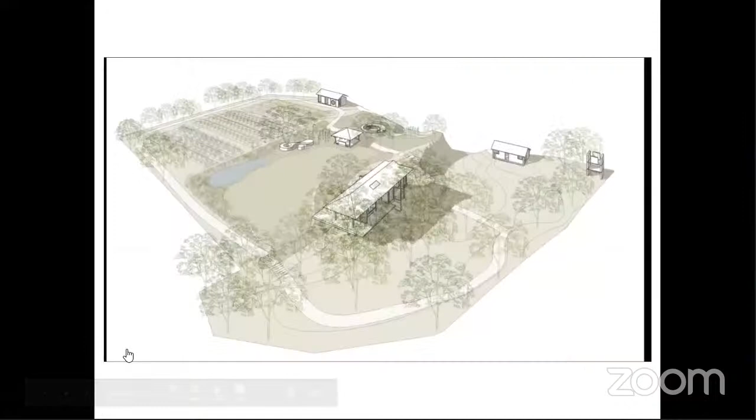Design United is a platform to create collaborations and opportunities amongst emerging designers from our region. Started during the pandemic, it has created connections and in-progress sessions with younger designers being mentored by leading eminent designers from around South Asia. Design Conversation and Design United has featured talented emerging designers from India, Nepal, Sri Lanka, Pakistan, and Bangladesh, selected for their innovative approaches and practices that have a deep resonance with the place they are from. Design United firmly believes in interdisciplinary conversation and learning, believing this will lead to a cross-pollination of ideas across various design disciplines and richer collaborations.

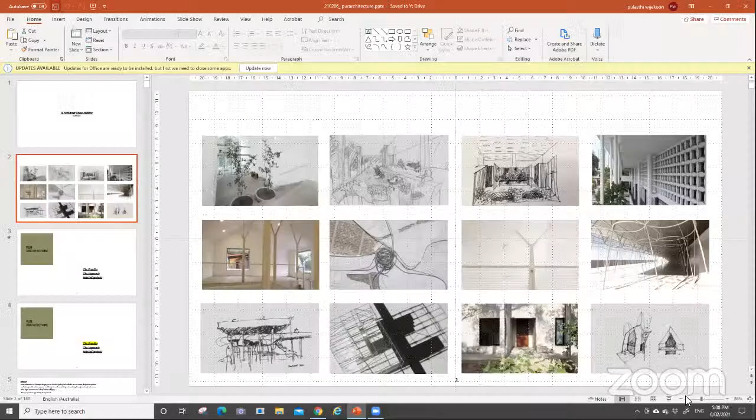So with that, today we've got - we are PUR Architecture - and today we've got a little bit of detail about our practice and our design approach, leading to some in-detail case studies of selected projects. About the practice: we are a boutique design practice based in Sydney and Colombo. I wouldn't elaborate on this one because it's already been talked about, but I just want to emphasize that we place a lot of weight on the idea work that we do - the work that happens before the real physical work begins, before the real drawing, drafting and sketching begins - the conceptual idea work. We put a lot of value on that in our practice.

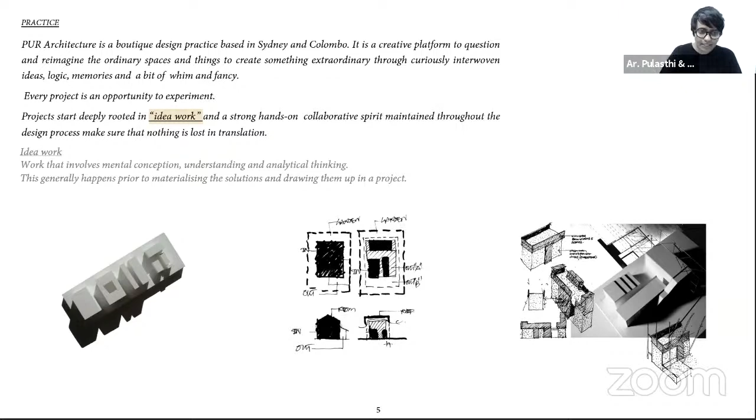And we have a commitment to sustainability, and for us, sustainability is not just the numbers, not just ticking the boxes. We work in, the way we work is we do a lot of passive design strategies in our designs, and then we use a very inclusive process, including the clients and all the parties involved in a project, digging deep, getting their ideas.

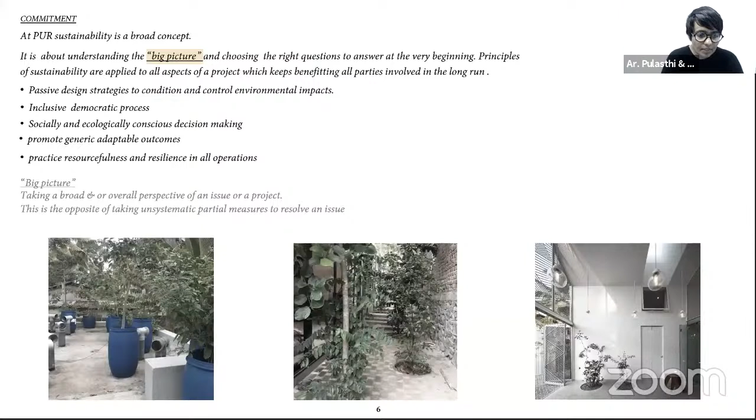And we are very conscious about our social and ecological impact of our projects, and promote generic, adaptable design solutions rather than specific ones, so that if your circumstances change in a few years time, still you can adapt the designs and it won't be redundant.

And we are a very resourceful and resilient practice in all our operations. We've been together, Pulasthi and myself, for more than 15 years, and we work with people that we know, that we have very good relationships with, lifelong relationships, who share the same passion and commitment to design and architecture. This includes the people that we work with as well as people that we work for.

And as Varuna mentioned, Pulasthi is the design director for DG5, a Sri Lankan firm doing a lot of good work in Sri Lanka.

Like drawing, and even before drawing, getting the ideas, composing it all in my head, telling stories, getting the characters, the ingredients together, composing and activating drama, like in space making and in architecture. So it's very similar to my childhood habit.

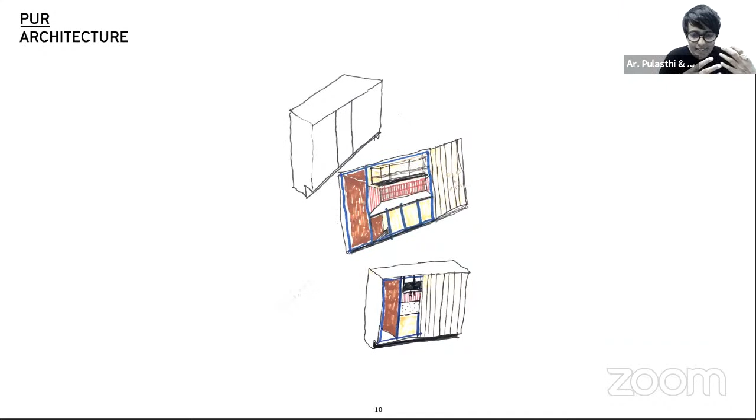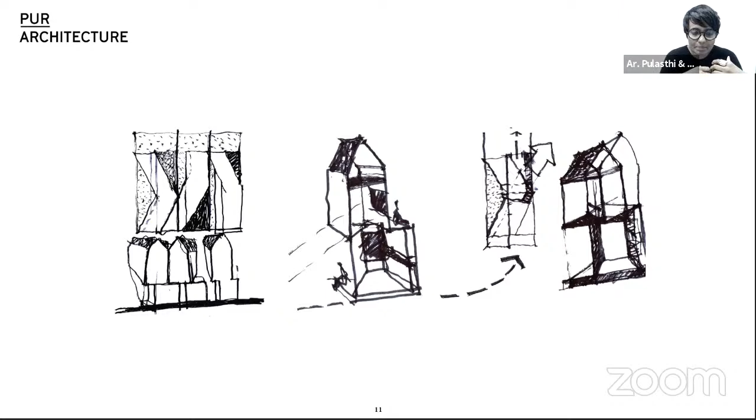So in our practice, we do a lot of drawings, a lot of doodling, a lot of sketching, and I feel that it's all an extension from our childhood habits, childhood passions. These drawings, I feel, are a bit different to what we used to do as painters, but they are a bit more meaningful now, have a bit more depth, and a different dimension.

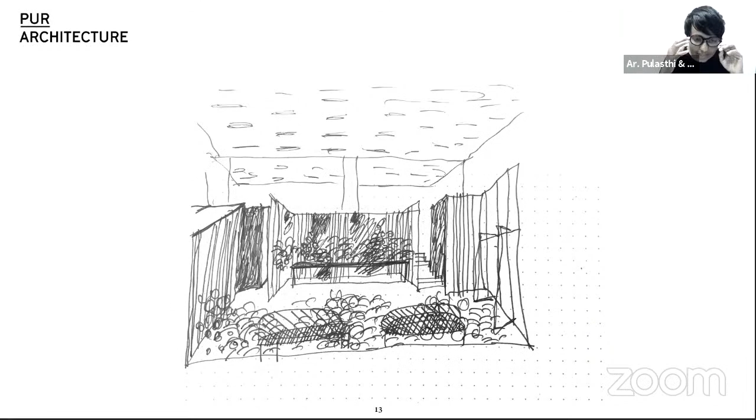And this is how we organize our thoughts in architecture, in space, in creating things. And this is how we communicate. This is how we draw out the ideas from inside, the visions, the dreaming, onto the paper and lay it out. This is how we communicate now. This is how we design now.

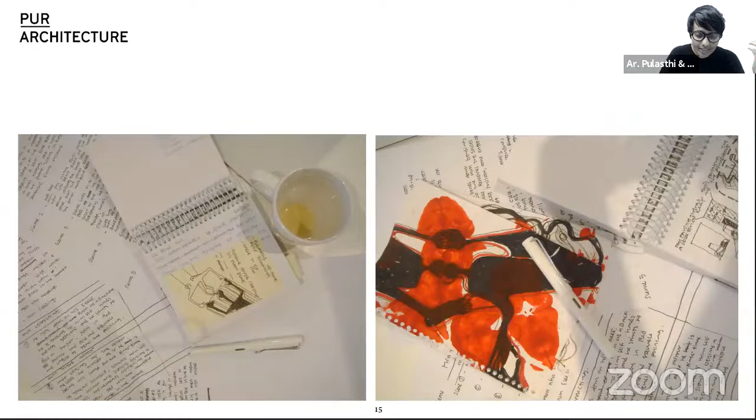And we do other things, like random things like writing short stories and trying to act them, trying to film them, and making abstract models to explore spatial ideas. We've always been making models and then photographing them and exploring communication through models.

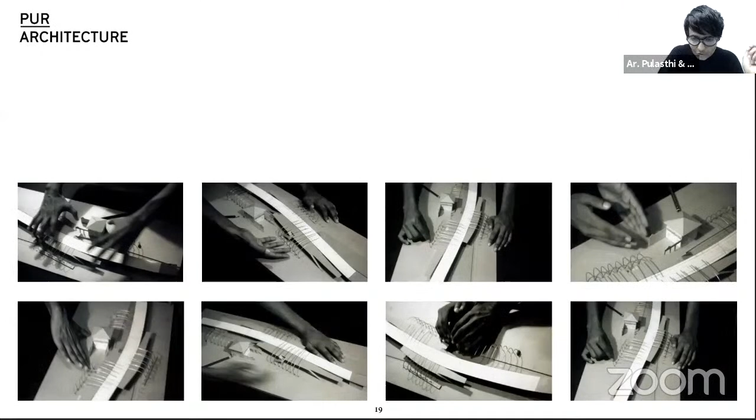So I would go through briefly a few random projects just to show our design approach, how we approach design in general in our studio. We use a lot of logic, a very logical approach to design.

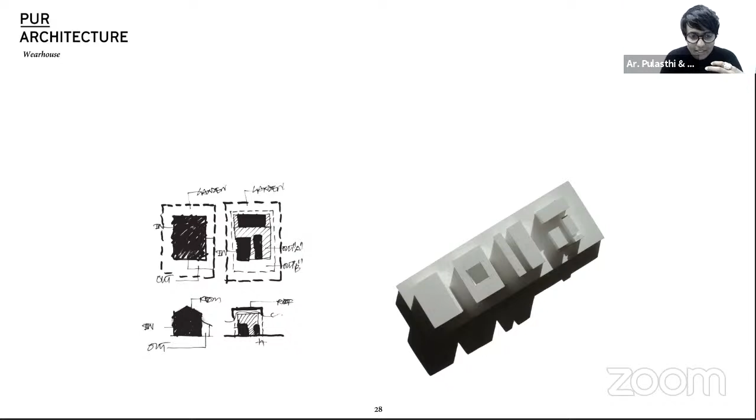This one is called Wearhouse, and it's a small suburban house in Colombo. Here we used a lot of why nots and what ifs, and we did a lot of things which generally in residential design people don't do. We did that with a lot of logic to back it up, and then we communicated it with the client, and with the client's understanding and approval.

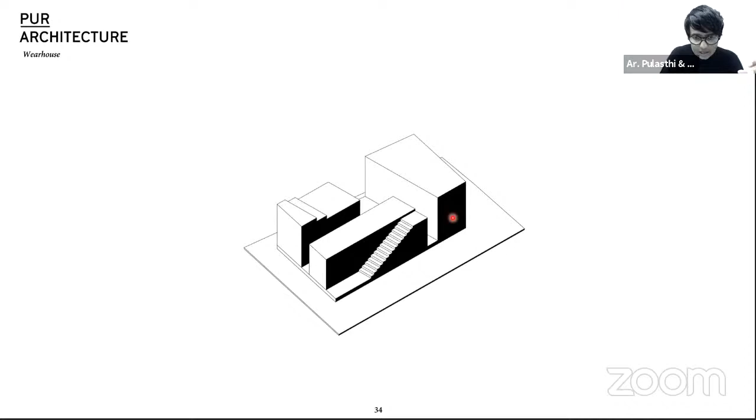So here's the site, and that's the building footprint. What we did was create 3 podium volumes, and these 3 podium volumes contain the sleeping and service areas of the house, the bathrooms, laundry, the sleeping areas. Then we created a big roof on top, which creates a volume, a field of space. And those 3 pavilions in the upper level become all the social spaces of the house, including the kitchen.

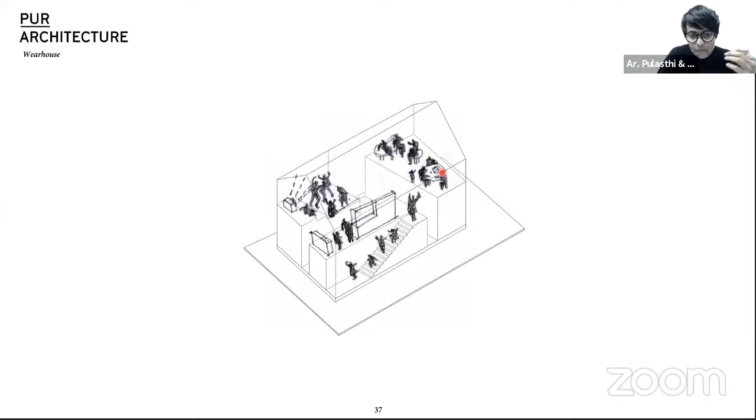So in a party, when you have a big crowd, you can really connect the whole space together, or have few people visiting, or watching a movie with a drop-down screen, or just the 3 family members having a quiet meal in the kitchen, while all the bedrooms and sleeping areas, the private areas, are tucked away underneath in the ground level. So this is a very different approach, but yes, we communicated this and talked about it with the client, and with their approval.

And then the roof is held up by all these ornamental tree-like columns.

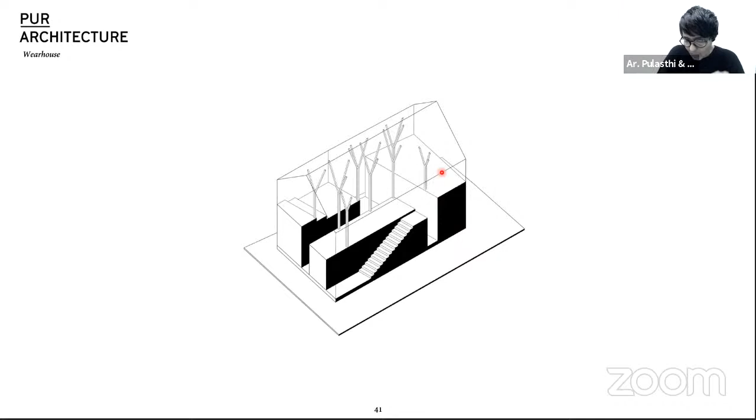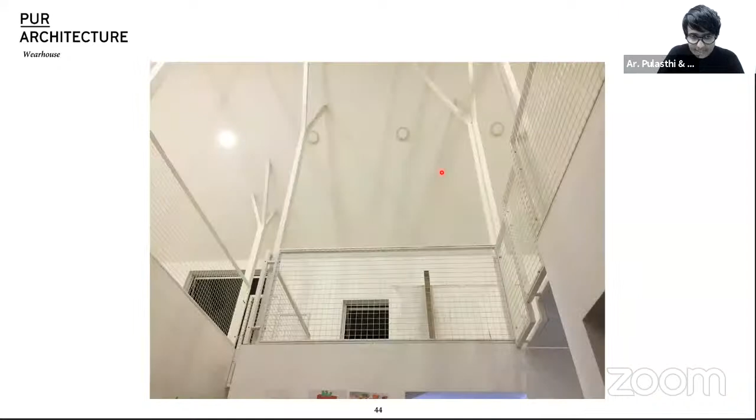And they look beautiful, but they are the structure which is holding up the roof. That sort of integrated approach to architecture is what we like to do in our studio, integrating structure and the aesthetics.

Our task was to design a function hall. We wanted to create a big volume of space and give it a bit of ornament, a bit of uplifting, so that the function hall becomes a space that you can celebrate things in, that brings in that spirit.

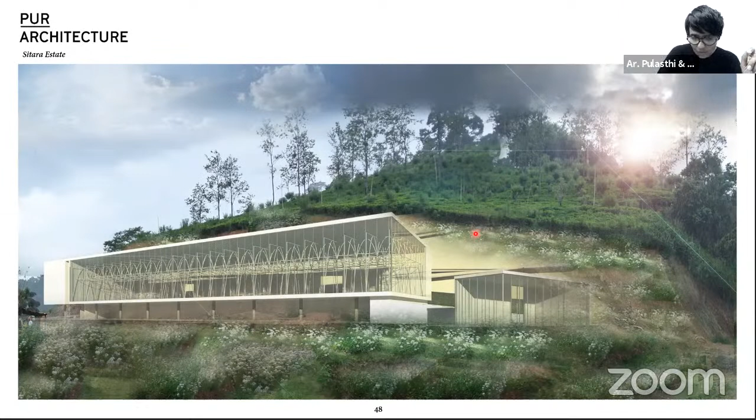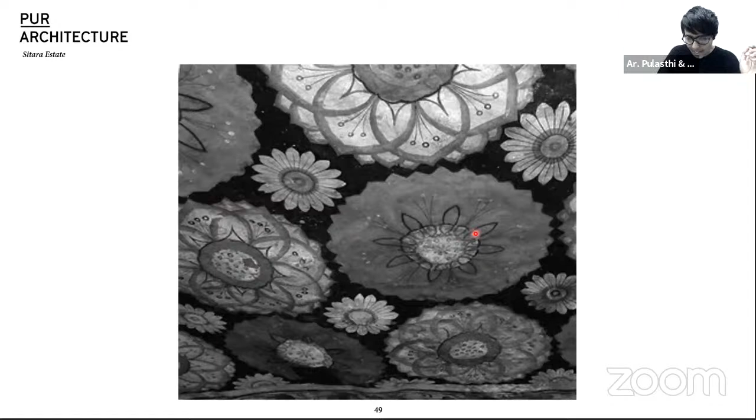This is ceiling frescoes from a traditional temple in Sri Lanka. In those cave temples, they used to paint floral motifs on the ceiling, called the Uduviyana, meaning a special sort of ceiling. Inspired by that, we created a Uduviyana, a celebrated ceiling, which incorporates our structure as well as the aesthetics.

And this was the result. So that's another view of that.

Also, we like to participate in competitions. I think that really opens up and lets us explore our ideas, test our ideas, when you're doing a competition.

This is a competition entry we did in 2010 for the Future High Rise competition. Here we created a high rise which is not the normal high rise, not what we normally know, but we created several pedestrian ramps starting from several significant streets of the city, coming to a nodal point and spiraling upwards, creating a vertical volume of space.

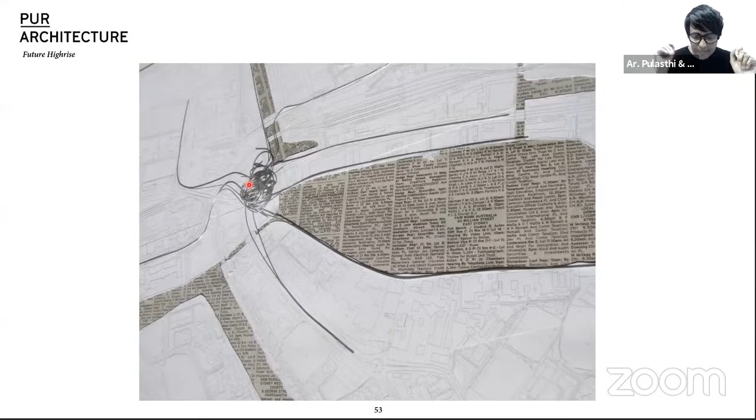This is for the street vendors of Sri Lanka, so their streets were created in a vertical volume. This is the part of the city, the lengths of the pavements these vendors are occupying. We culminated all that into 7 different ramps, starting from 7 different locations, and vertically extruded it up, creating a vertical volume. So it's a very different high rise for a very different purpose.

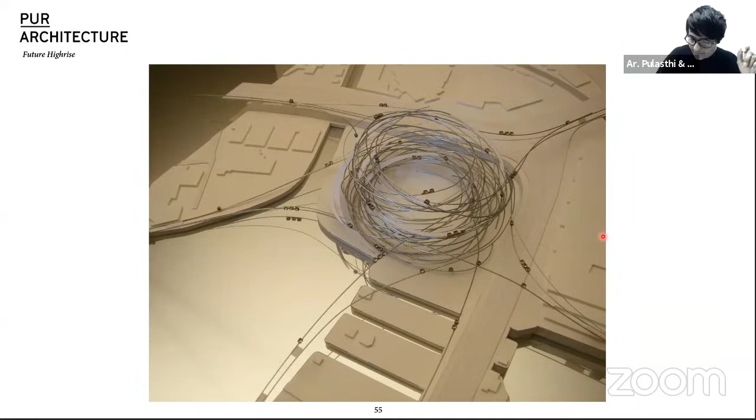So we like doing that sort of experimentation, experimenting and exploring new ideas for preconceived building typologies. This is another competition we did in 2015, Sustainable Headquarters for Sustainable Energy Authority.

We didn't win this one, but it's still a nice project to include, I thought. As the Sustainable Energy Authority, they wanted their building to be an example of sustainability.

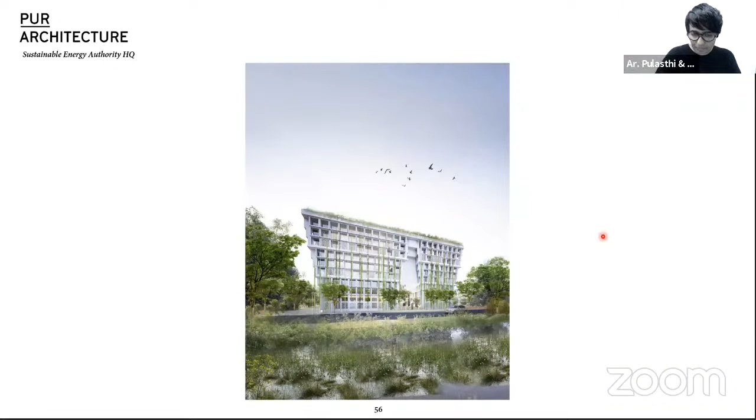We started off with the facade, creating a modulated, tapering, self-shading facade going around the building. Rather than designing one square block of a building, we tapered the edges and created a courtyard, an open volume in the middle, with all the facades tapering.

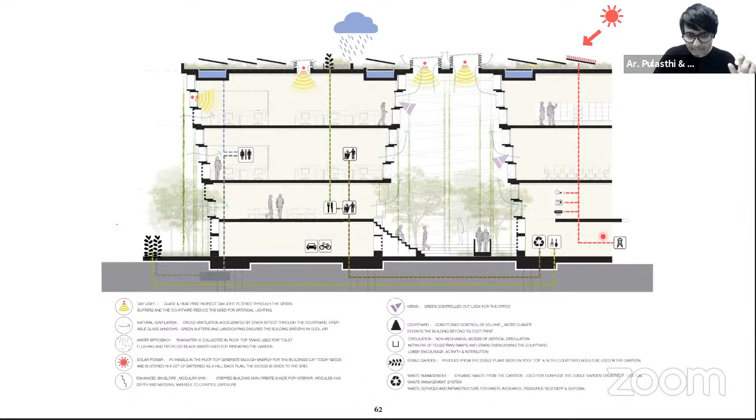And that is the result. This ESD diagram shows all the operations, how this building is functioning, how the cross ventilation is working, how we are getting light from the courtyard in the middle, how we are creating a central space with trees and social interactions, and how the filtered light is coming into the building — all of these things with one integrated solution.

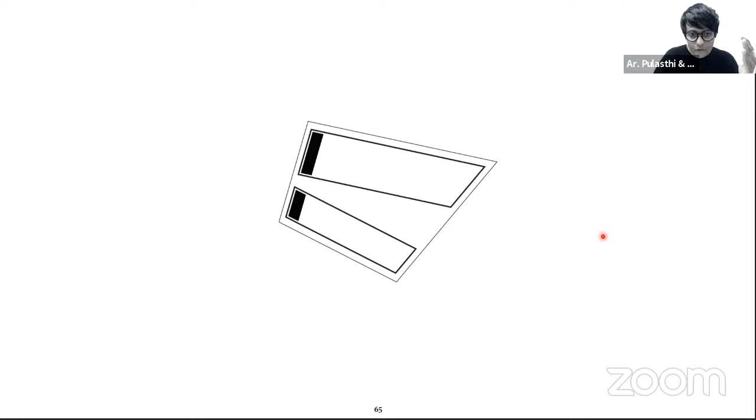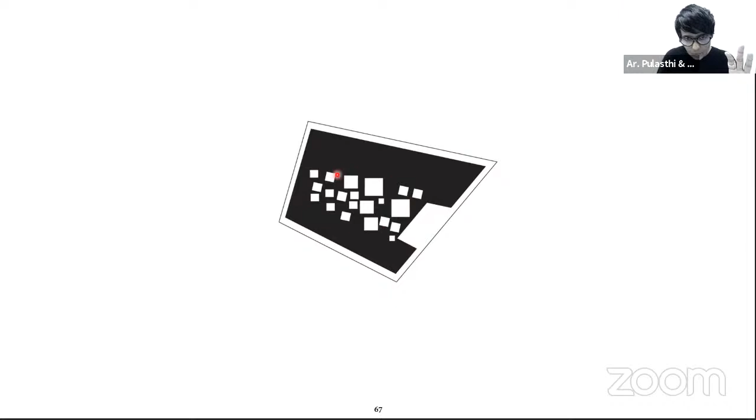This is the site, and we placed two blocks of building facing the shorter sides east and west for better orientation, and circulated the services on the western side to block excess heat gain. This is a lift-free building, so all the pedestrian circulation — staircases, connecting bridge, and the pedestrian ramp — frame the courtyard. On the rooftop, we put a slab over, and a lot of skylights.

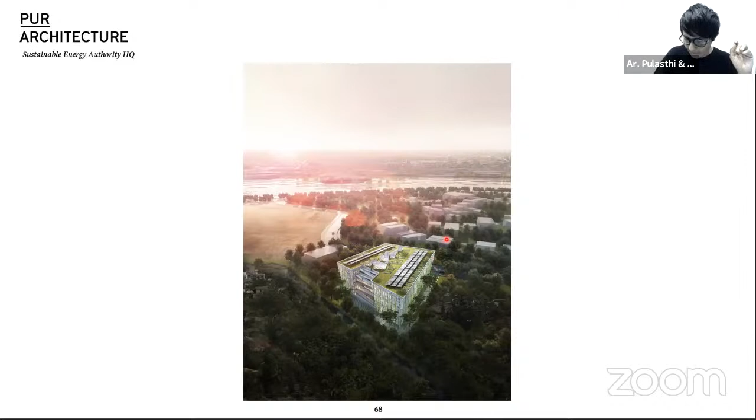That's the aerial view — that's the Sri Lankan Parliament here, and we are here. That's the courtyard building, the main social space, which feeds into the interiors of the building, bringing in light and ventilation and creating a big social space. And that's the facade system, a modular facade where we can select and choose the modules and materiality to adapt.

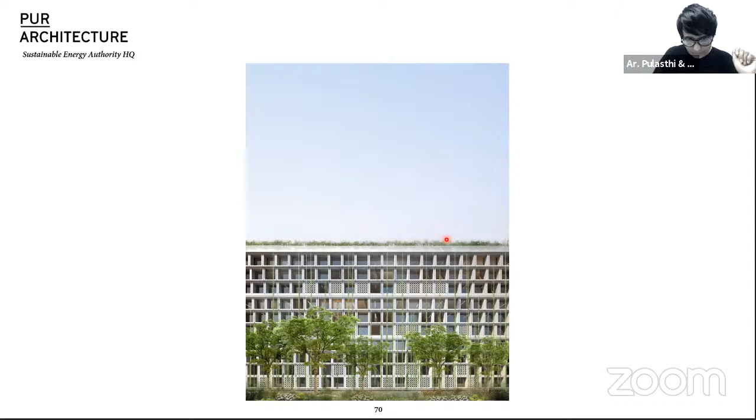So with that, I will go into some projects in detail.

We got 3 projects today: House in House, Big Tree Small Plants, and the CMC office building.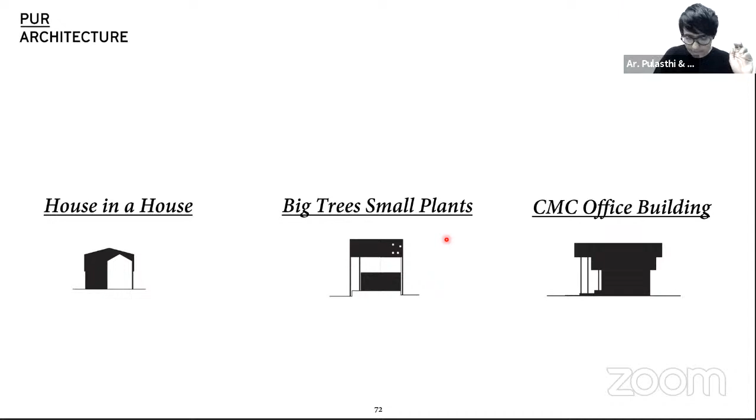House in House is probably one some of you have seen. It's a suburban house in Colombo. That's the site, a rectilinear site where we created a rectilinear block with a barn-shaped roof, and then putting an extrusion through that. The idea was to create a tunnel through from here to the other side, connecting the front garden to the rear garden, and putting some skylights through east facing.

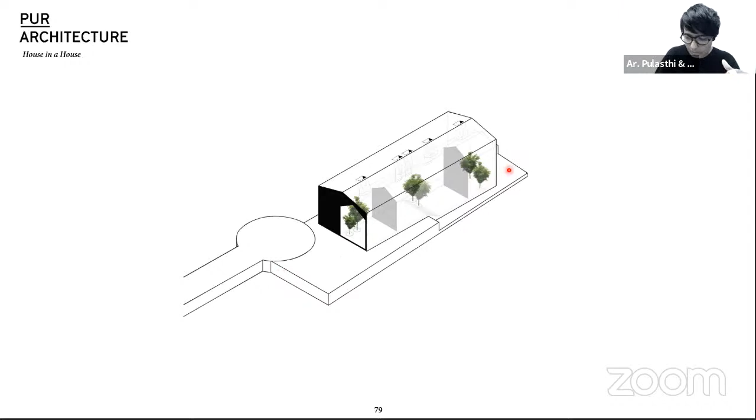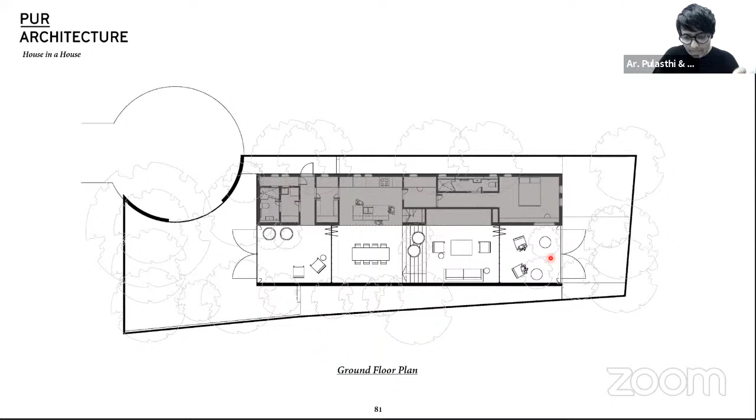In the plan, we just had a bare site with 2 coconut trees, and then we ended up planting 24 trees, and internally we ended up planting 6 trees. The zoning of the plan is all the living and service areas on one wing, and all the main living spaces on the other wing, which is a double height.

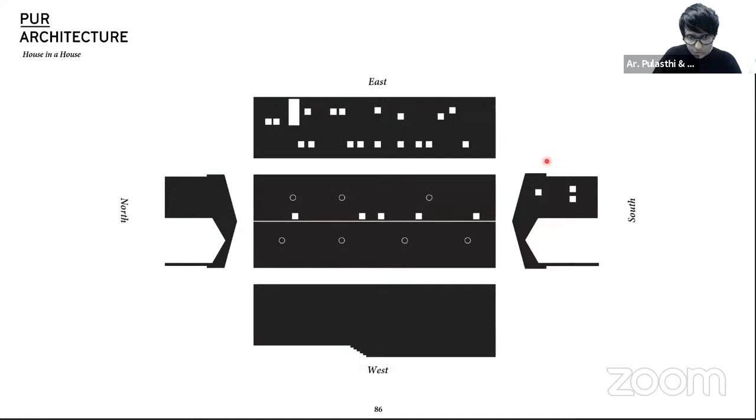This is showing all the external facades of the house, all 4 facades and the roof here. You can see that the western facade has no opening, not a single window in it. All the small windows we've got are on the eastern side, very small, to generate air circulation and cross ventilation. The main source of light is the 5 skylights on the roof.

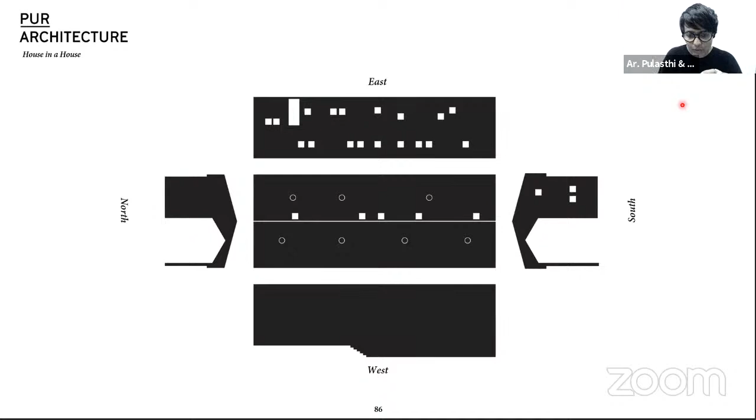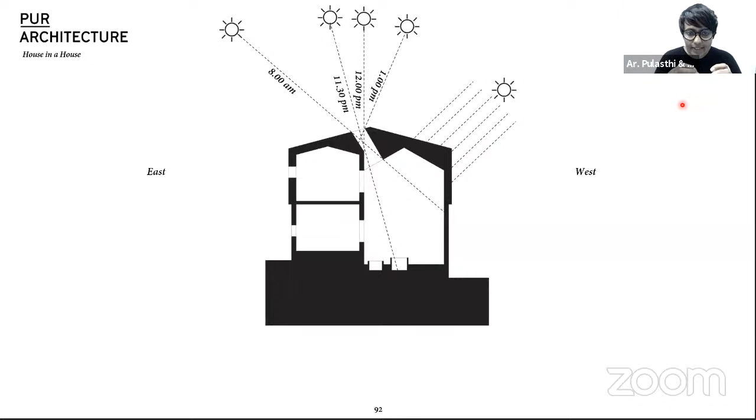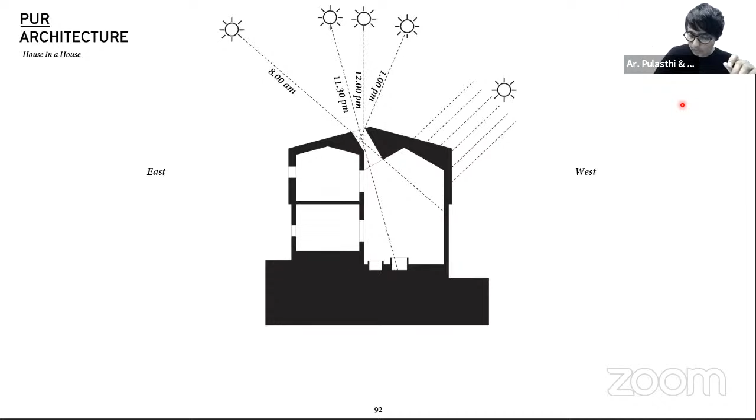The way the skylights are working is because of their angle. On the west side we don't have any opening at all, but because of the skylight angle, the midday hot sun is not coming in. It's always filtered, always soft light coming through. As the sun moves, you can see the shadows moving as well, animating the whole space.

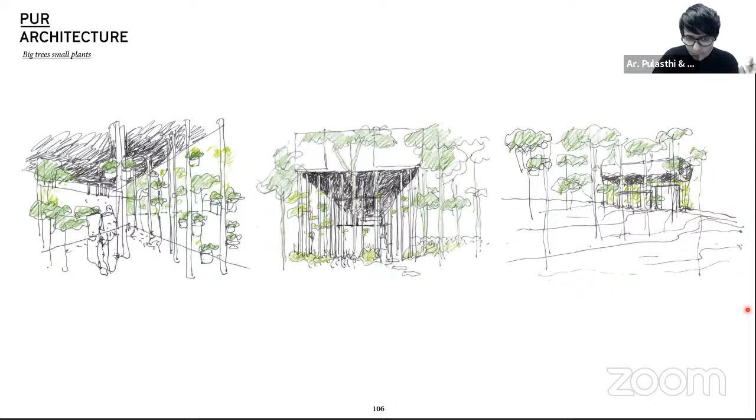With the site planning, we had a relatively larger site here, but the idea was to concentrate the development so that we retain more of the garden area. So we went vertically, and also located the house right at the corner of the site, with only space for a small service pathway. That way we retain most of the site for enjoying.

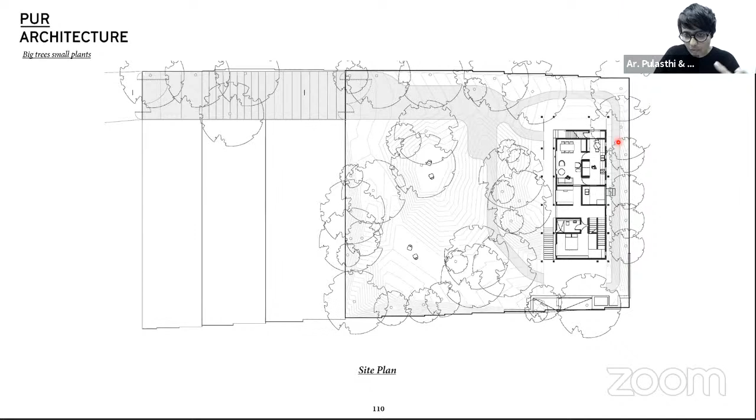In the ground floor, normally ground floors need a lot of things, so we let the ground floor have all of that, but the main living area we located on level 1, one whole floor dedicated for living, and then to the full length of the living floor we got a veranda.

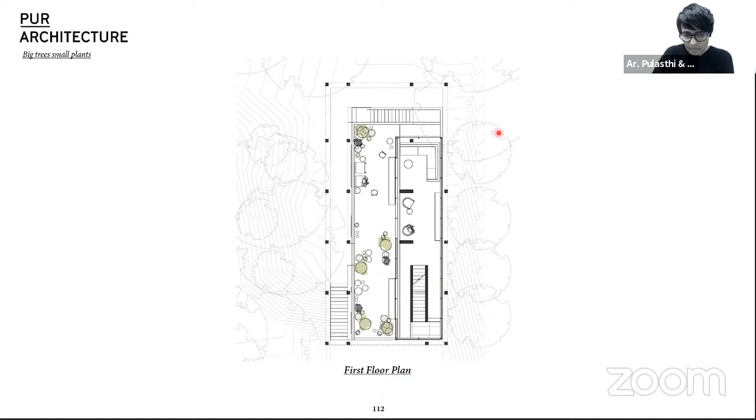So when you open up the sliding windows, the whole thing becomes one big space. Then we've got the upper level, the topmost level, which acts like one big roof hovering over the whole house, held up by these slender columns.

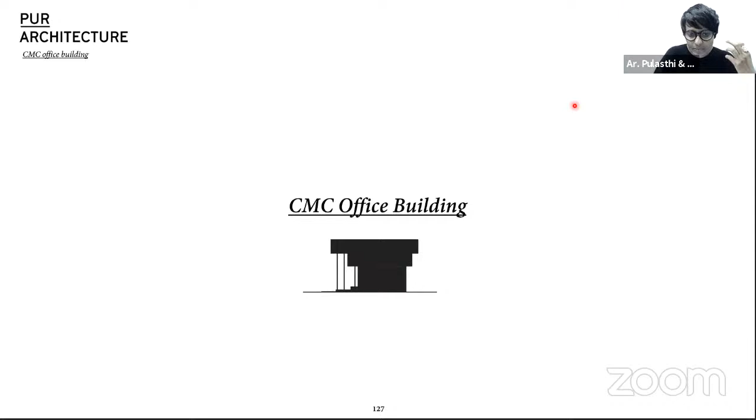This is the last project I'm presenting, and this is a competition winning entry in 2014. We entered the competition to design an office building for the Colombo Municipal Council, which is this building, which is looking like the White House, which is here.

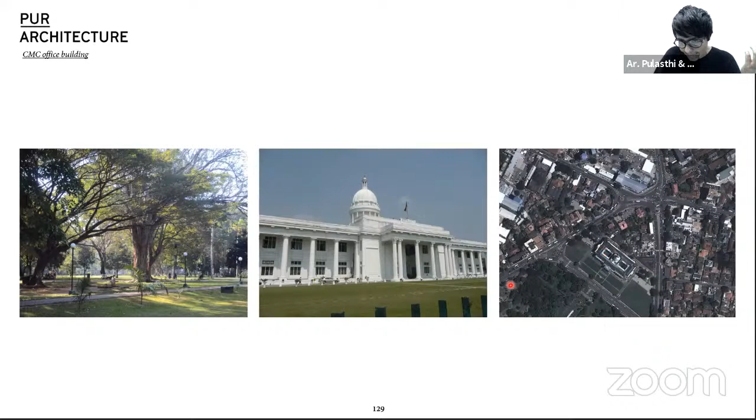And our site is this double triangular site at the back of the council building. This big, huge space here is a park. So the site is characterized by one of the main considerations, the iconic prominent council building, then the big greenery in front of it, and then all this area is the random low-rise densely packed urban fabric.

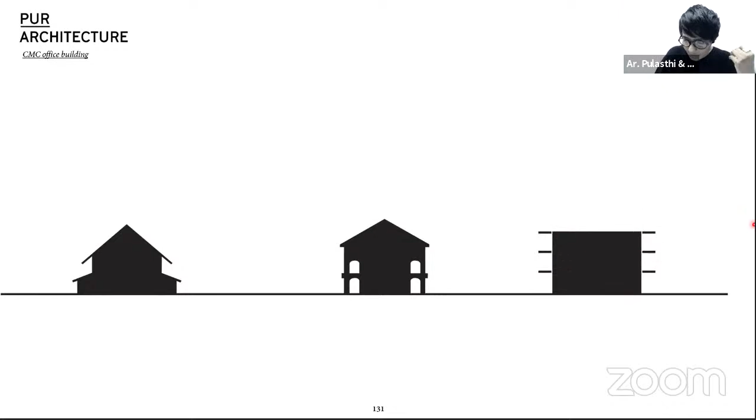So we looked at office building typologies, the veranda type, the arcade type, or the more modern box with awnings stuck onto it. And then soon we realized that this site needs something a bit more than that.

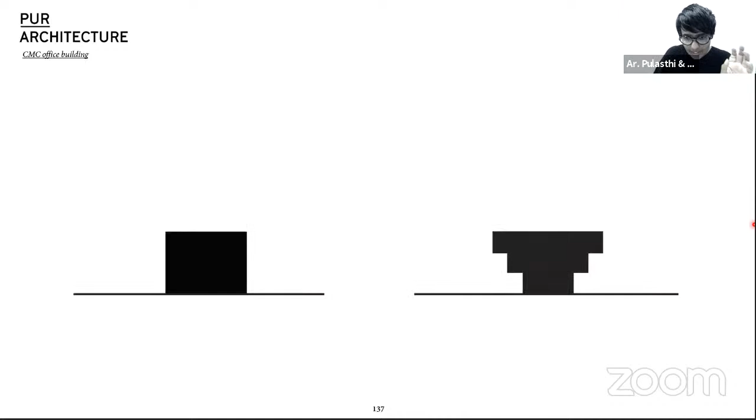So we went ahead with the box, the modern interpretation, and then we took some of the space up and put them there, creating this profile. This profile has the same floor area as the box, but it's got some attributes which really help the brief.

Got a lot more space in the ground floor for people, for more landscaping, self-shading and protection from rain, and more space on the rooftop for solar panels and rain collection.

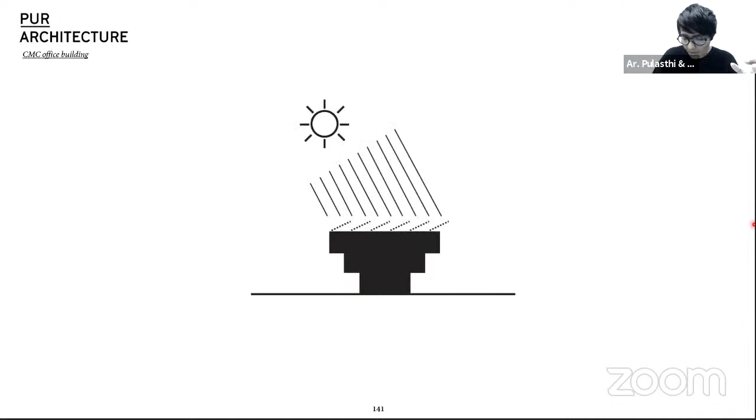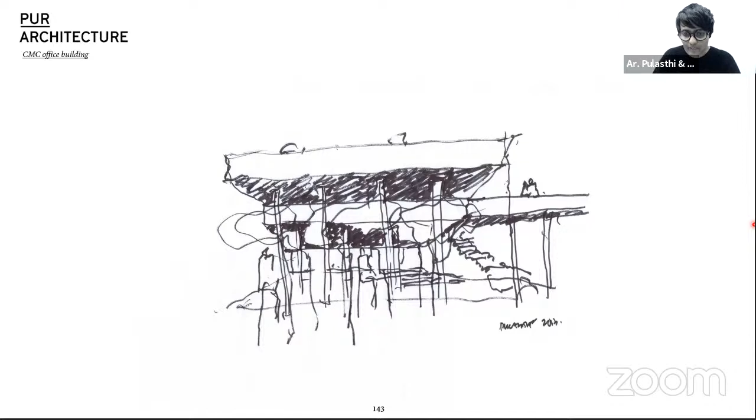So what we ended up doing is a veranda with tall columns, two double-story height columns with lots of trees in the ground floor and lots of space for people to hang around, because this is a public building and people need a lot of space. A lot of people come here, this is the council building, and they need space to hang around.

So it's very pleasurable to have a space like this. In the big picture, that's the old council with its arcade here, and then the veranda we created here, the landscaping, this is the through-site link. It's really creating and talking to each other, creating this nice atmosphere and a public space outside.

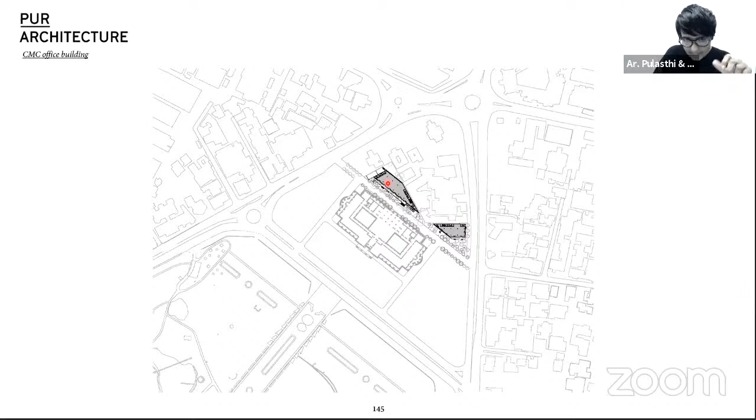So this is in plan, that's the through-site link with all the landscaping and verandas, and it's really melting together in the site and providing all this space for casual waiting and hanging around for the people.

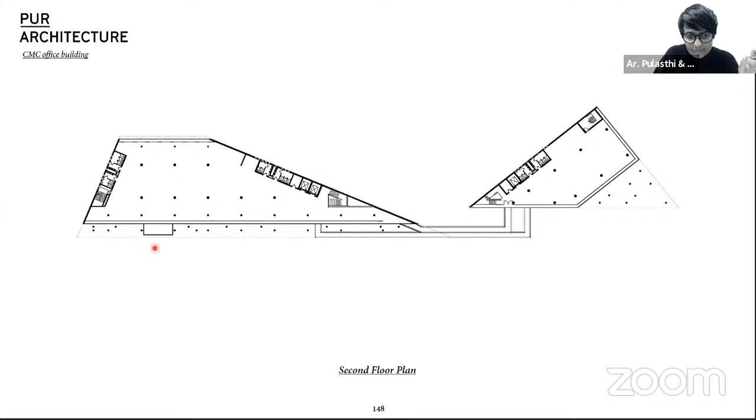So the ground floor, as you go up, the floor levels become larger, and the uppermost level is the largest, and the roof hovers over that, creating this stepping facade. You can see we've got these slender columns, which talk to the traditional columns of the existing building, and then this space is coming alive while we've got all these office spaces inside.

So we went for a recessed glazed skin with a perforated concrete screen in front, which has proven to be a very helpful thing to keep the building cool and internally creating beautiful shadows.

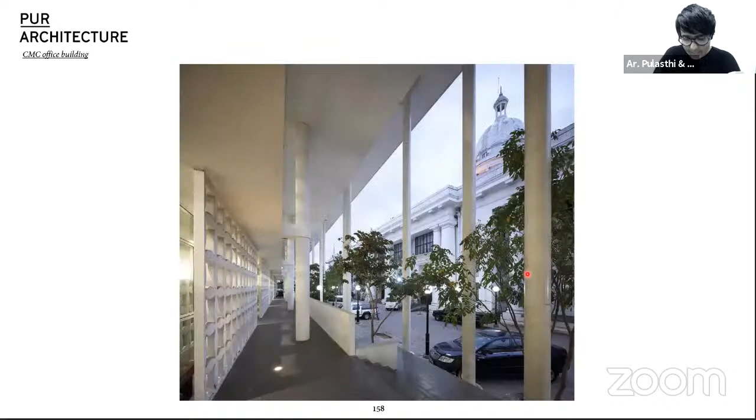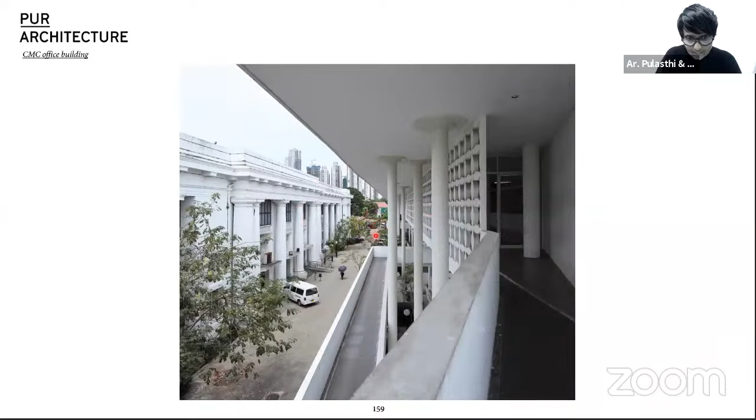And some of the images of the veranda, some of the old and the new talking to each other, linking together. Views, another view of the veranda volume.

And this is, I really like this image. It really shows two aspects of Colombo, the low-rise buildings on this side and the high-rise, more ambitious Colombo, the colonial buildings and the more modern buildings, showing what a diverse city Colombo is.

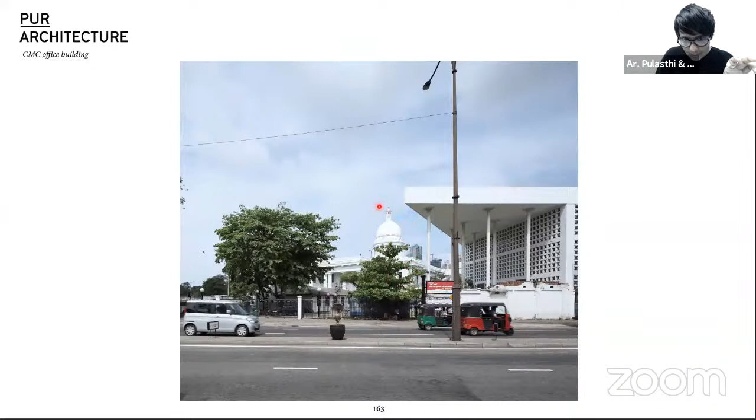And a very dynamic view with a bird at the tip of the facade of the through-site link. We initially took this volume off so that we could give more focused and framed views of the council building, as a gesture of respect to the old building.

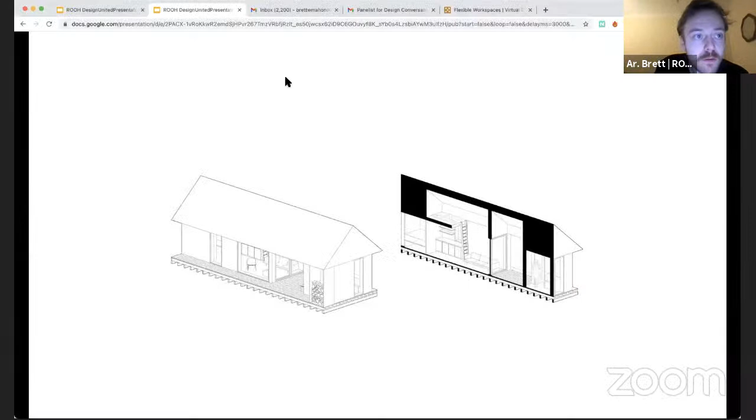Yeah, hi. Thank you, Per Architecture, for your amazing work. It's really inspirational for us to learn from you guys. And thank you, Design United, for having us and giving us an opportunity to share our work. Because I think dialogue is a very important thing in architecture, and unless we have this discourse, we don't evolve as architects and as designers. So I'm here to talk about ROOH Studio along with my friend Brett.

So ROOH Studio, we started this in 2020. We are just a group of friends who had a different perspective about architecture. This is our beautiful team, and we are all located, as you can see, in different parts of the world, working very remotely right now thanks to the pandemic. We first met a couple of years ago while running workshops. ROOH Studio started off seriously this year in Switzerland, where the four of us met and thought we should do something about our thoughts and give it a collective name. And that's how ROOH Studio started to begin.

Yeah, it really started through a conversation of friends. We all met through various student bodies of architecture, be it EASA, the European Assembly of Student Architects, or NASA India. We met, became friends, and shared a lot of similar thoughts on architecture, on where we saw it going and where our voice wanted to go with it.

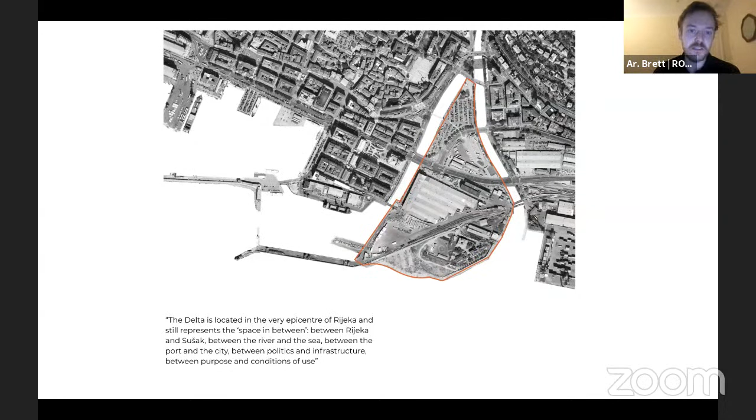This is at the core of a lot of our thought process behind architecture - we started off building quite small interventions, always focused around the social aspects of architecture and reusing and adapting spaces. So with this project, we wanted to create a focal point, and show that these buildings can be used, that there's still life and value left in industrial heritage.

Over the space of 2 weeks, there was an event held in this expo building, which held 600 architecture students living, sleeping, partying together here. That spurred us on to create a project that would become a frontage, a project that would have a dialogue with the city beyond, rather than turning its back to the industrial buildings of this area, to show that these buildings could be used.

So Level Up was essentially an event space, a hangout space, a social space at the front of this building. The inside of the building was to be used by multiple organizations over the next 2 years in the lead up to cultural capital in Rijeka, and we wanted to create a pavilion out the front that was a frontage to this, a social space.

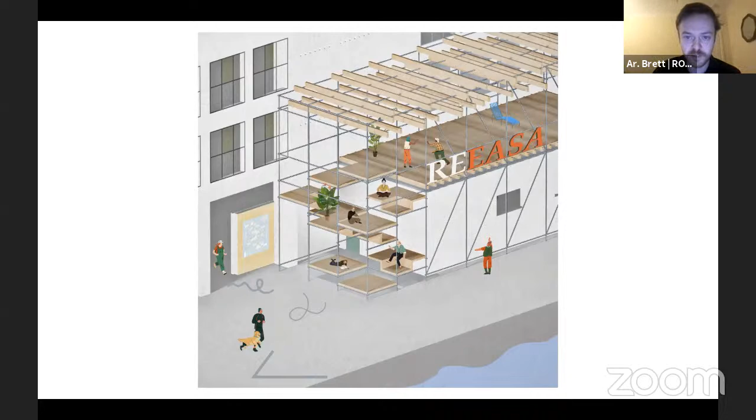It slowly developed into almost this extended staircase of the city, a hangout spot that led up to an event platform.

We were conscious of what sort of materials we wanted to use, and we wanted to be able to use the materials again, to have this idea of reuse. So we started developing this idea around using scaffolding, which could be hired and dismantled, and then timber - as simple as just timber insets, which was sourced from the local timber merchant.

All the materials and budget behind this whole project came through finding the money for this project, calling sponsors, finding people who wanted to give us materials. All the vegetation and planting was donated as well.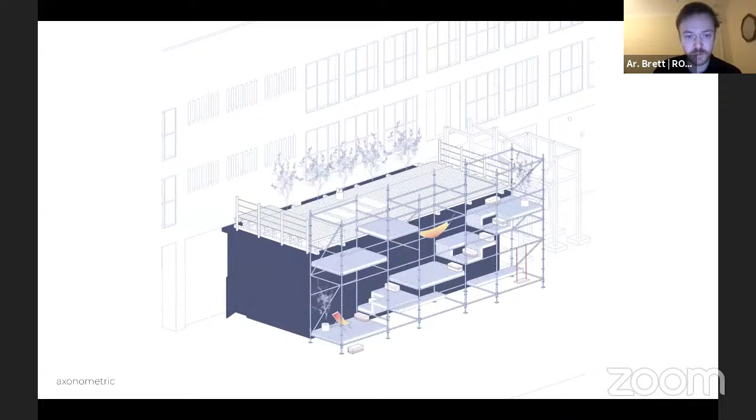So it was very much a self-built project, and this is just the 2 weeks we spent building the project, with 22 participants, and you can see they all come from different backgrounds.

This is really key to us whenever we were setting up the workshop - we wanted everyone to not know each other and to come from different backgrounds. Over the 2 weeks we slept, ate, partied, and built together, and a lot of the working out of the details we left to be figured out on site. We all worked together and learned from each other's skills to be able to build this, and we kind of became a family for those 2 weeks.

It was a really, really inspiring project that taught us a lot about how we could build something and raise awareness, and also that we didn't necessarily need to wait - we could be proactive about finding projects ourselves, proactive about finding the money, and also learn how to self-build.

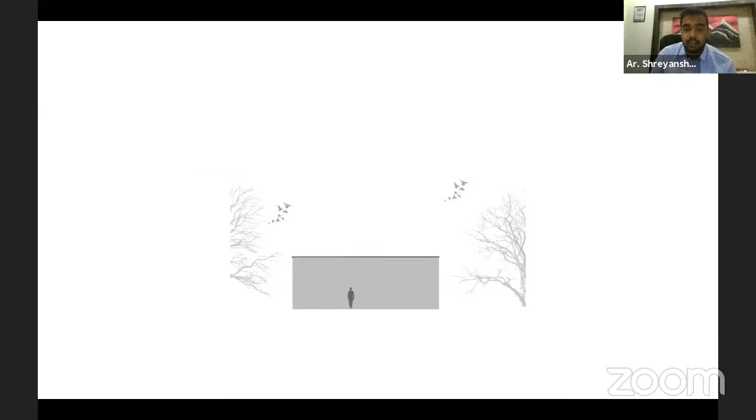So this context was very beautiful. It had almond trees on both sides, and one of the residents was a photographer, and he would click pictures of beautiful birds which you'd see around the structure. So our entire intention of this house was to invite the birds into your house and not restrict them on both sides of the houses.

And thus we thought of creating many punctures and courtyards, because we feel nature is the best building material. It's something which doesn't get old, it keeps on transforming, it's dynamic. And thus we build this birdhouse, which is actually a series of connecting courtyards. It helps the photographer to click pictures from his sofa, from his dining room, probably every place.

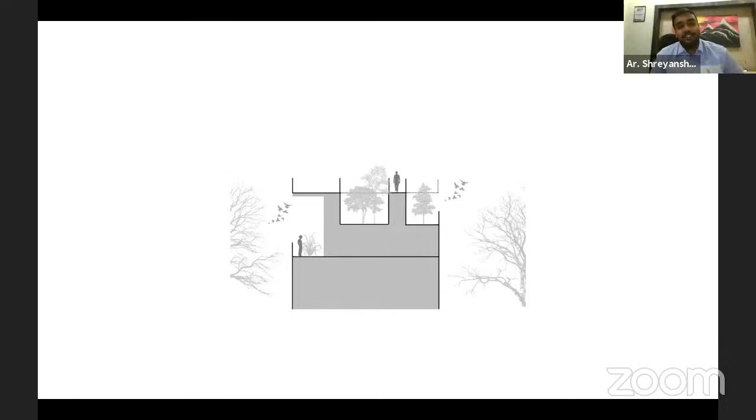And this is the image of the courtyards. As you can see, it's totally open for allowing the birds to enter, and the landscaping is done in a way that it invites more birds, more species of birds across.

And this is the simple plan. As you can see, we have minimized the bedrooms because we feel that bedrooms are a waste of space, since that's a space where you spend the least amount of time. So in a way we removed all the bedrooms and converted them into transformable spaces for people to live and interact with nature in a more open way.

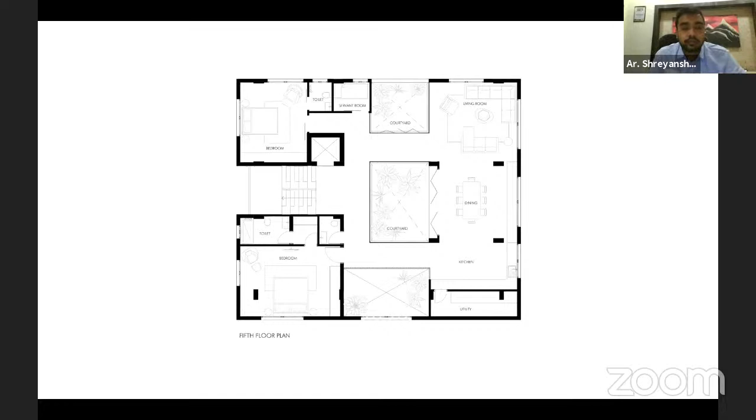You can see the image of the birdhouse. This is the section. As you can see how all the spaces are interlinked and it doesn't feel like a flat, which is how the generic building was to start off with.

And now this project is under planning. As you can see, these are the courtyards which connect, and there's ample amount of natural light to it. So you probably won't even need to switch on lights during the day because it's so open and nice, and it allows the wind to blow through the rooms and the spaces.

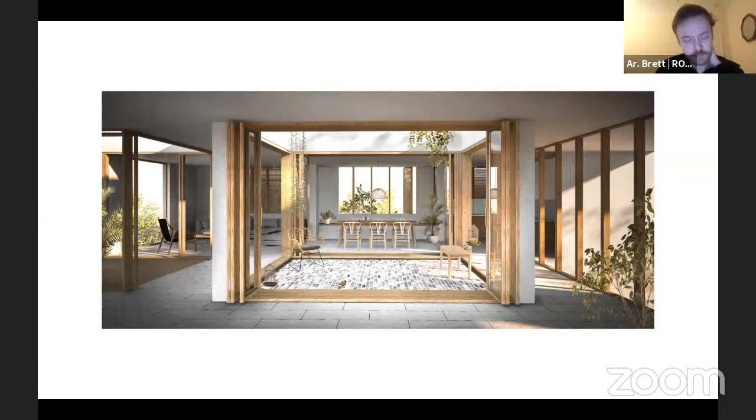I guess a lot of this came from this idea of cross ventilation as well, and recessed courtyards that have quite a deep depth to them, in a sense that you get light that floods in from above. Also in terms of materiality, we've started into the detailed design of this project, and we really wanted to pare back the materials to be as honest as they can, and really let the spaces speak more, or let the flow of movement or the flow of air have a bigger presence in the building form itself.

And this is maybe another image of how we envision it to be once it's built. The lining of each of these courtyards is intended to incorporate planters and different species, to allow for different species of birds. As Sonny said, because of the area it's surrounded by, there's a unique opportunity to have wildlife in the city centre.

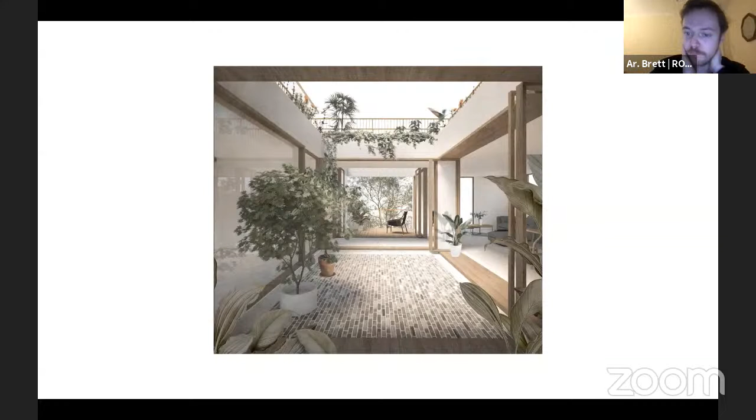So this leads us on to the final project we'll quickly talk about. There's a theme that follows a lot of our work to date: this idea of nature, of looking outwards, as well as creating simplicity in form and in plan, and spaces using cross ventilation and lighting and shadow as the main tools of exploring the space. This project is micro living within nature.

It's five cabin typologies we've been developing with a Finnish timber construction company. It came about through a conversation with a carpenter and engineer in Finland, a mutual connection to Jonas, one of our partners. The carpenter, Jonathan, is a master carpenter trained in France, in the French Alps.

His background is that he started a company two years ago to create unique accommodation in nature, one-off houses. It's small scale micro living, but he was doing a lot of one-offs, and we had a conversation with him about designing a bunch of prototypes we could prefabricate and sell, and bring to market.

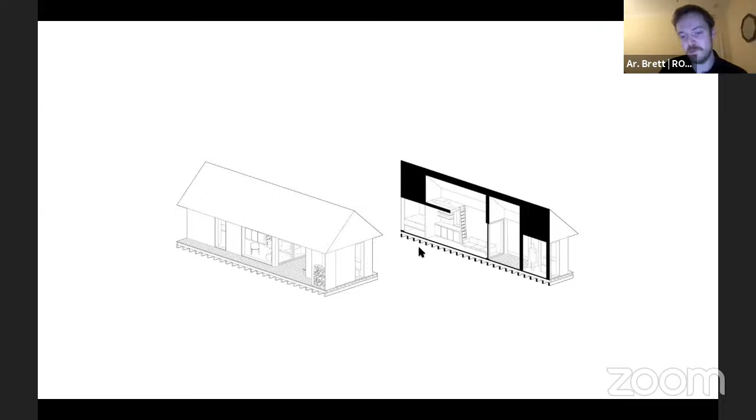These cabins, each so compact, allow for different usage in such a small space. By introducing a mezzanine, you can have a space with a roof light above it where you can look at the stars in the evening. A secluded bedroom at the back creates a getaway space, or a sort of cave-like space, that you can retreat into if you don't want to be part of the social gathering in the main living space.

And the same goes with the second option: it's based around a central plan that allows for a living space and a sleeping space, with shelving and a bench by a window.

But it was about trying to promote this micro living, this condensed way of living, where you don't really need as much space as people ask for. We find that whenever you work with clients, they always want more area, bigger footprints, but you can do a lot with minimal intervention or minimal space requirements.

There's maybe more of an argument to not automatically jump to building double the floor area just because you want it. That's a question we keep asking ourselves, even on bigger projects: is it necessary, and how do we convince someone they don't need all this extra space when there's only maybe two people living in a house they ask to be 300 square meters?

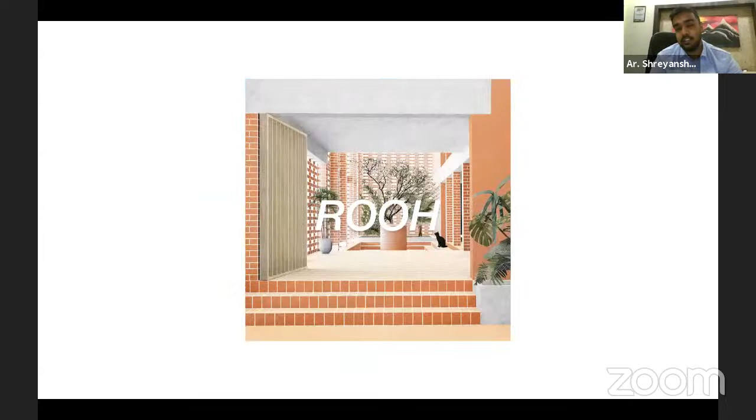I think that clearly sums up our intention. We build what we want to, and then we figure out how to build that. That has been our process in Rooh for so long, that we think if this is a problem, we have to solve it. We try to solve it, and then we try to find sponsors who will pay us to make those things.

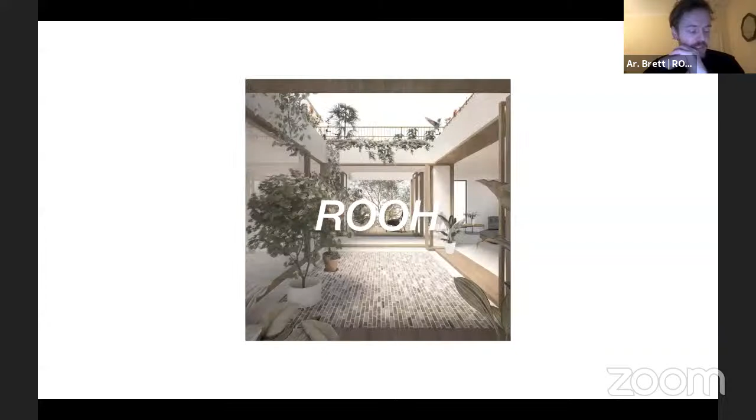It's a difficult one, and it's one that we're kind of finding our feet with, but it's something that we feel is really important, is the question why we're doing something, or what outcome do we want in the process. So thank you very much.

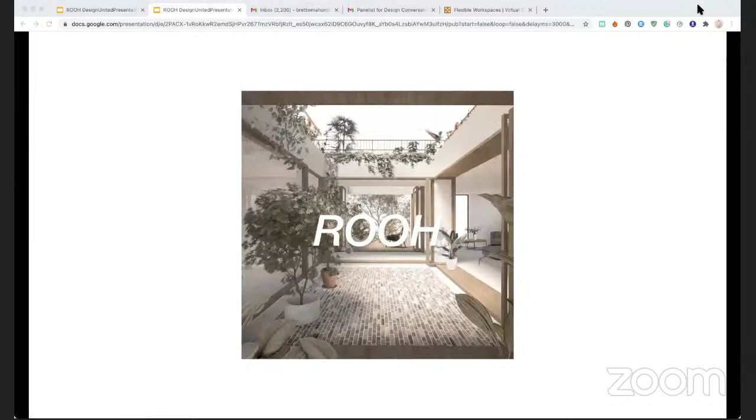Thank you, Shreyansh and Brett, for sharing your work and approach with Rooh, your deep concerns for the basic human needs, food, shelter, environment, and approaching architecture through almost an innovative, playful lens to create architecture that is useful and widely accessible. We wish you the very best with your journey with Rooh.

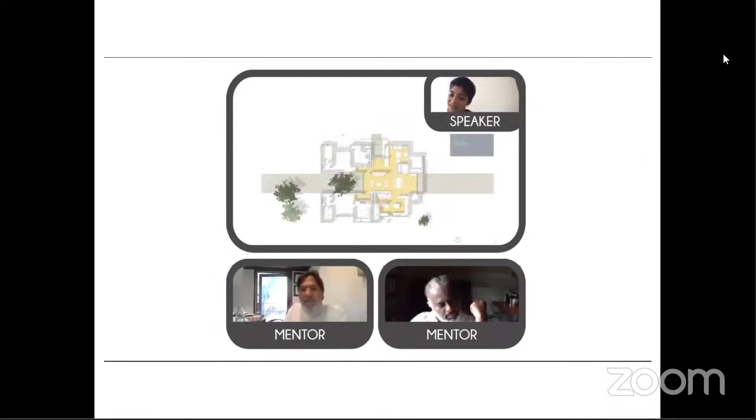Talented young designers and design studios working on design innovation with an approach that is relevant to our South Asian region have been invited to be a part of the platform. We also encourage design students from the region to share their work, be involved in the dialogue, and to be an active part of Design United.

Design United, most of all, believes in creating a community of designers and design knowledge that is largely contextual, with focus on contributing to the environment and our community. Design United believes greatly in a spirit of collaboration and idea exchange.